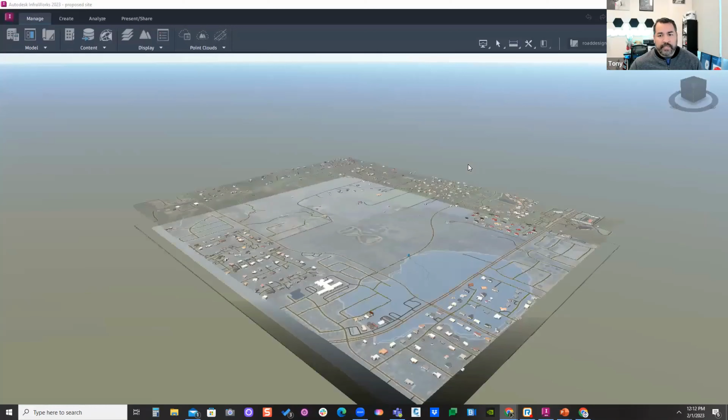Okay, it's still building the model. This really typically also depends on how large your model is, how long it takes to open, how big the file is here. All right, so when I first started, it's under the master view. This is what I have here. This was actually another proposal.

Let's switch over. It's running a little slow today. All right, here we go.

Now I'm in conceptual view. So I've actually lowered the resolution and added transparency for better performance. And then when I'm done, I go back and change this to engineering view so it looks more vivid, as you can see here. So I'm basically just working in my conceptual view.

Now I want to build something. I want to build a road here and analyze a culvert. So I'm going to go into Create, then into Transportation, and I'm going to do a planning road first. I'm just going to design something simple in here, go into, let's say, a 2-lane road.

Let's see, this sidewalk, green space street. I'm going to select this one, move this over and connect to this area intersection right here. And I'm going to connect to the road that's over here, this intersection point over here. So I'm going to draw a straight line and come in at an angle, draw 2 radiuses, and then connect to this point here.

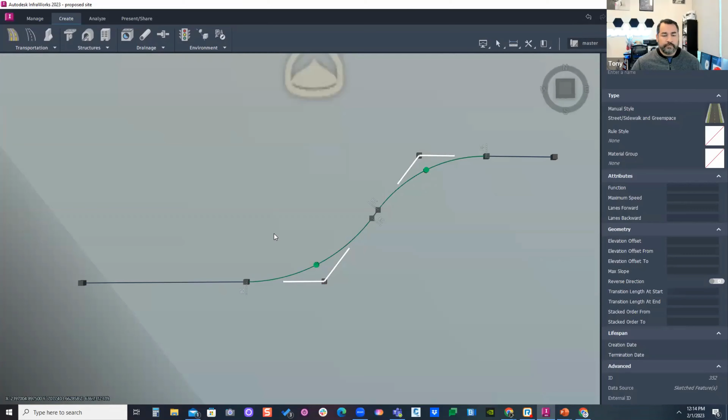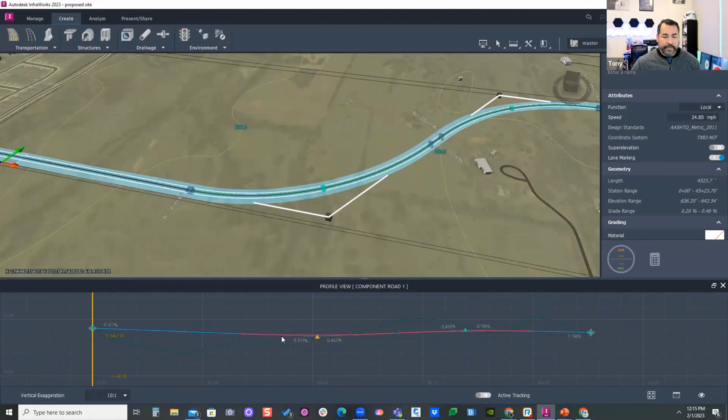Okay, and then I can look at the profile of this road. I zoom in and look at the profile and see it's actually identified. I actually have some low and high points here, but I'm going to go in here, move these high points and low points. I'm going to add a curve in here.

I'm going to move this over, I'm going to slide this over. Now, I'm not following transportation design parameters right now, I'm just creating some low and high points just for this webinar. And here, if I zoom in, I'll be able to see the curve. I can make it larger.

And of course, I'm exaggerating a lot right now. I would probably have another curve right here. Let me just keep zooming out here. And I could actually have another high point here, but just to save time, I'm just showing you some lows and high points in here. Let me lower this a little bit more to get closer to existing conditions.

And yes, I could create just a rolling hill of high and low points through here on this profile of this road, but we'll hold what we have right now. Let me make this curve a little bit bigger.

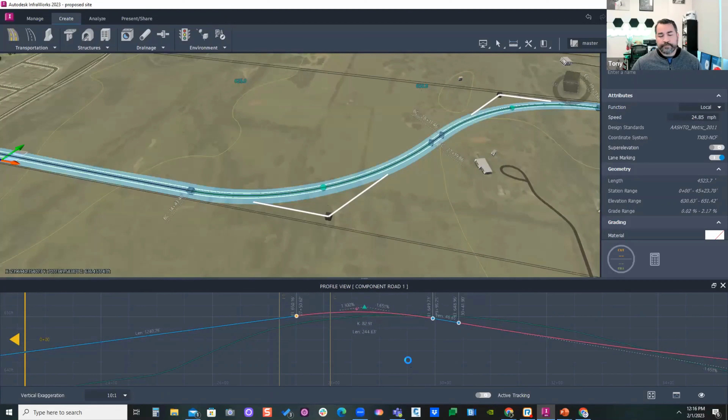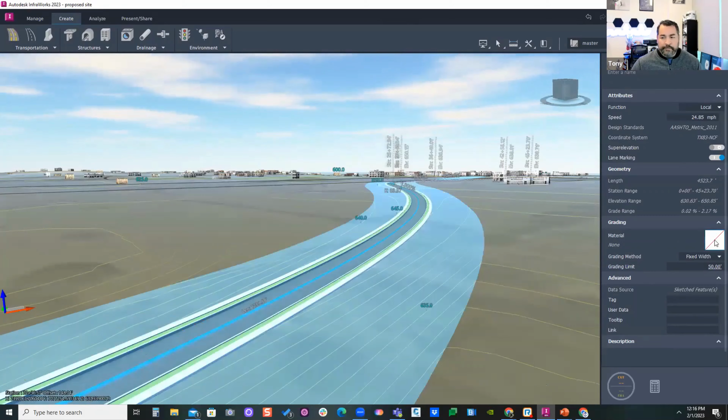And as you can see, we have some roadside grading happening here, and you can control that. Right now it has a fixed width on the roadside grading, but I can change that fixed width to, let's just say, I'm going to put 50 here to give it plenty of room to grade out to natural ground for my road here.

So now that I have this model, I want to know where is water draining? I can't tell visually by the aerial, so I'm going to use my terrain tool.

So if I go to manage and display and go to terrain themes, let me just go ahead and delete this here and create a new one. I'll hit the plus symbol. And I'm going to use at the bottom here, the palette types. I'm going to use the USGS DEM palette type.

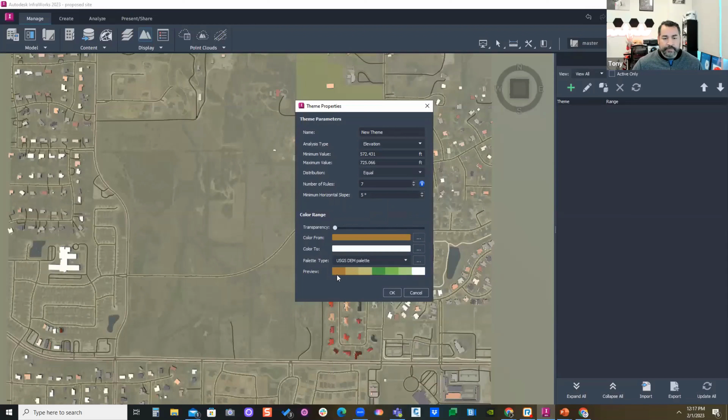You can see here, this is kind of what you see on the USGS maps. And I can add a transparency also on here. I'll hit OK.

Now I'm going to change my, because of the style I have here, but you can kind of see it, I can edit that transparency. As you can see, it's changing here. But now I can identify, okay, green, white is the very top, green is a higher elevation, and brown, the dark brown, you start seeing valley gutters and stuff.

So in here, I can see that there's actually a natural stream, kind of a low-lying area through here, a riverbank or creek bank through here. So I know there's going to be a low point somewhere in this area here. So I'm going to turn this back off. I do have the contours turned on, so when I zoom in, you'll start seeing more and more contours being displayed. And that's through your visual style in here, so you can turn on the contours.

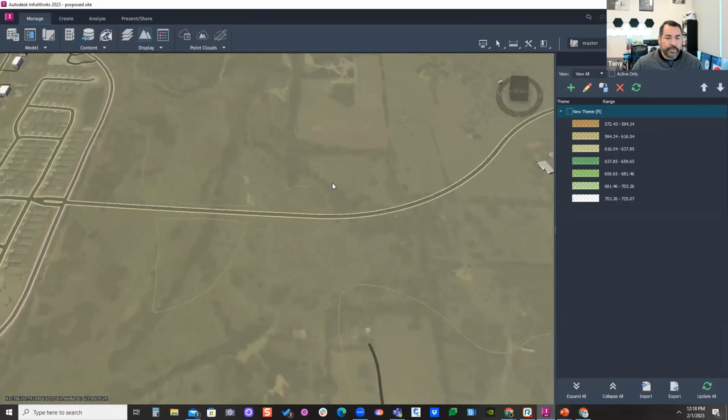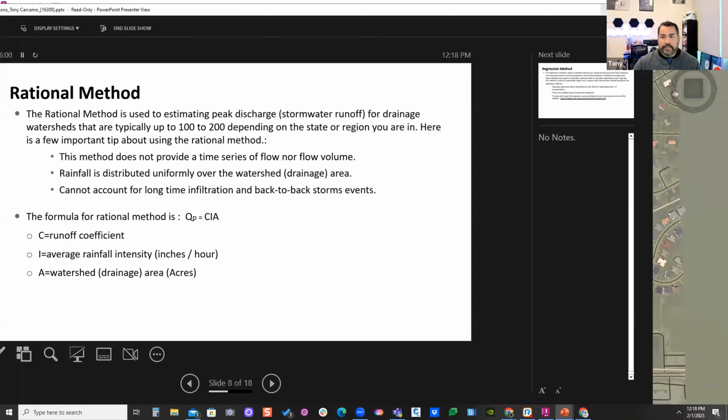Okay, so I do have a component road. Let's go ahead and build a watershed. Now, the watershed, I want to slide this over real quick, this PowerPoint slide. See if I can minimize this in here. Oop, not this screen. Let me talk about the actual methods in here real quick. So I'm going to stop sharing this and share my other screen.

There's three types that InfraWorks is using. So the first type, let me go back to the first one, is the rational method. Typically that's being used for up to 100, 200 acres, depending on your state or region. Every state and region has some kind of stormwater design manual or regional stormwater manual that tells you what that maximum limit is when you're using rational method.

And what is that formula? Really it is the peak flow, so basically your coefficient times your intensity times your area. That's the rational method formula. Some of the important things to think about is this method does not provide a time series of flow nor flow volume. Rainfall is distributed uniformly over a watershed or a drainage area. It cannot account for long-time infiltration or back-to-back storm events. Just things to think about when you're doing rational methods.

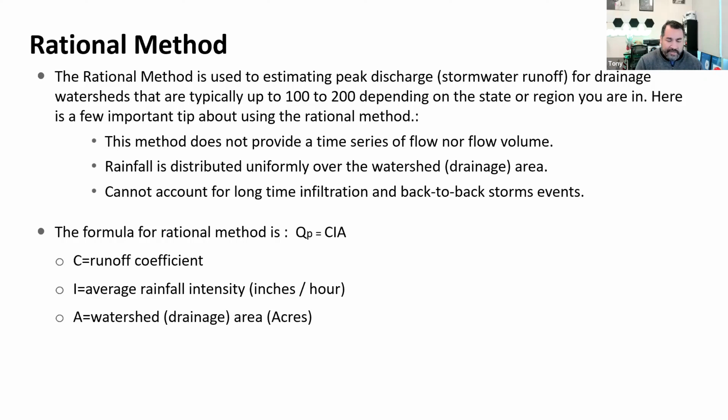The other method that InfraWorks also provides is the regression method. It's used to estimate statistics for seasonal or annual low flow frequency and seasonal period of record and period of record flow durations. So InfraWorks in here provides, like each state, the data that's been collected by USGS. Typically, this is created for those state departments, transportation departments, and you'll have those peak regions for each state that you can select from a pull down in here.

So there's the website where it's actually pulling this data from. If you want to, if you need to know which website it's coming from, it's from that USGS maps. That's the link right there for the data.

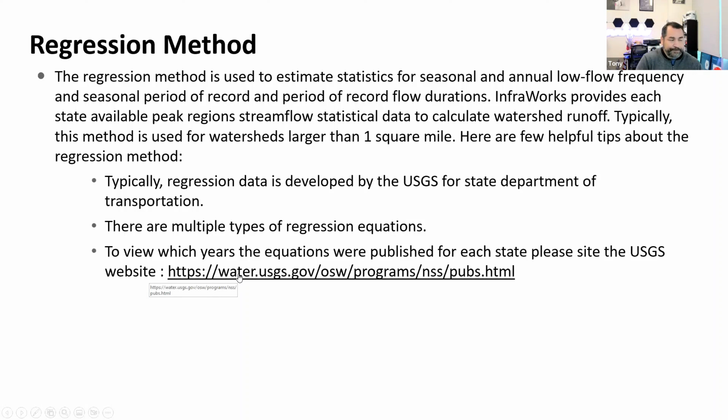And then the third option is a user defined, which you are selecting the coefficient and you're manually typing in the actual rainfall. And you can get that straight from, typically when I'm doing design, I'm getting that straight from the local or the county or the state regional design manual, city drainage manual, or even stormwater manuals and stuff like that. So even transportation actually have that coefficient or that rainfall data for you already provided for you.

Okay, so let me stop sharing and go back to my other screen, to my InfraWorks. I'm going to create a watershed to see what it can find crossing this road I just designed.

Let's go into my analysis, I'm going to say watershed. It says it's going to use credits, I'm going to click OK. I think the credit's been removed, if I remember right. It recognizes this component road, so I'm just going to click inside the component road.

But here on the watershed, we have these analysis settings. These tell you, when it's calculating based on the terrain, the grid spacing. So do you want it every 20 meters? And how many actual grid points do you want within that area? Typically I lower this down, it becomes more accurate when you lower it.

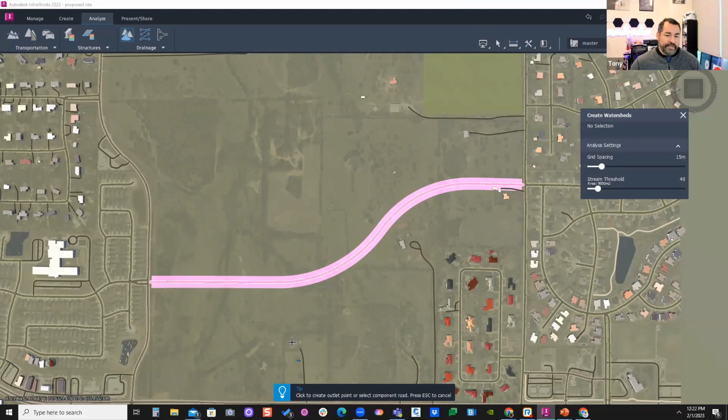So I'm going to lower this down. It's all about the grid points when it's doing its analysis for the watershed. For bigger areas, I wouldn't have it like this, I'd have it more towards the middle for larger areas. But I'm going to come in here knowing the water's traveling north, and point just inside the road and hit enter to select the whole road, so it can identify what's actually crossing that component road I just designed.

Now, typically I would have just created a new proposal. I wouldn't have done this in the master proposal. So it's actually looking at what I have in the model based on the terrain.

All right, and this is what it came up with. It identified 2 locations where this drainage - let me turn on back to engineering view. As you can see right here, it actually has 2 small streams that cross this component road, identifying 2 drainage patterns. Now some people call it watersheds, some call it drainage patterns, in some regions they call it drainage areas. I like to call them drainage areas, but it just depends on what region of the United States you're in.

Okay, so I can actually color code this. If you don't want to identify this by colors in different regions, you can click on here and change it in my little asset card. I can change that color to something different for each pattern, as you can see there. Now it's telling me I don't have anything because I haven't assigned the actual hydrology method.

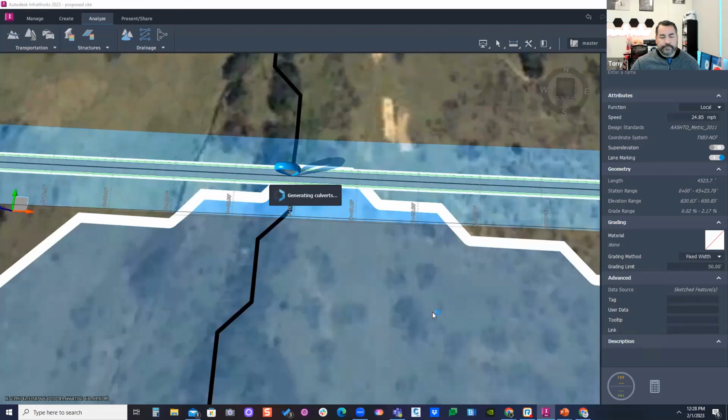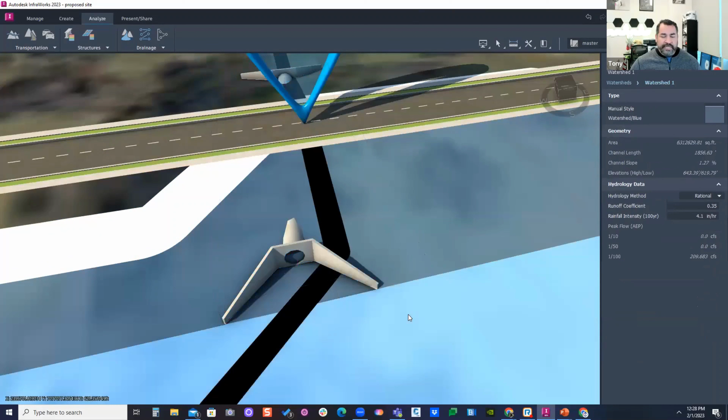It's going to place a generic culvert in there for me, and it should be placing two. Okay, there it is, there's one culvert already. I'll click on it. Notice here, because I already assigned a watershed, it already sized the culvert for me. Notice it jumped to 66 inches in my dialog box.

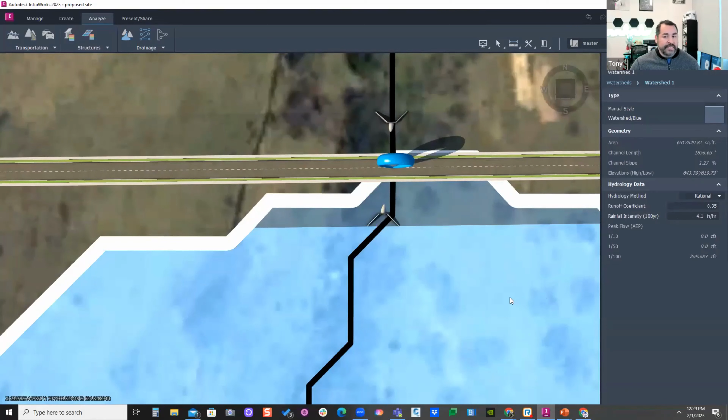If I didn't assign a hydrology method for this watershed and left it as default, which said zero, and placed the culvert, then came back and assigned the hydrology method, it would size the pipe. As soon as I clicked on the pipe, it would upsize it and do the analysis for me. So this software actually does a preliminary culvert sizing for you automatically.

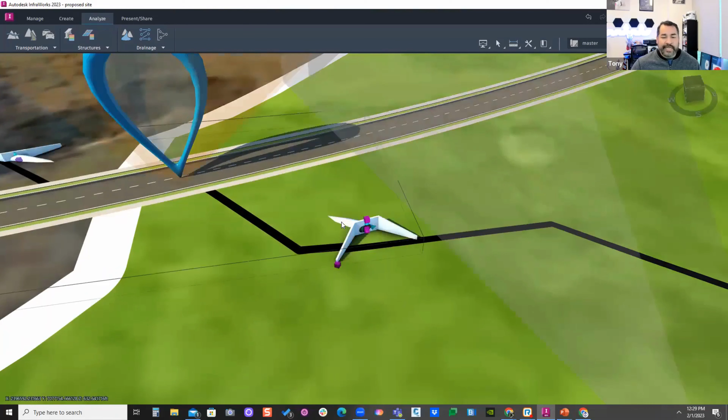Let's go look at the other one real quick. Here's the other one, it's coming at an angle. There's the stream. Now, you don't have to use these parts, you can use a box and stuff. So if I click on the pipe, I can change the actual piping. I can go to a box.

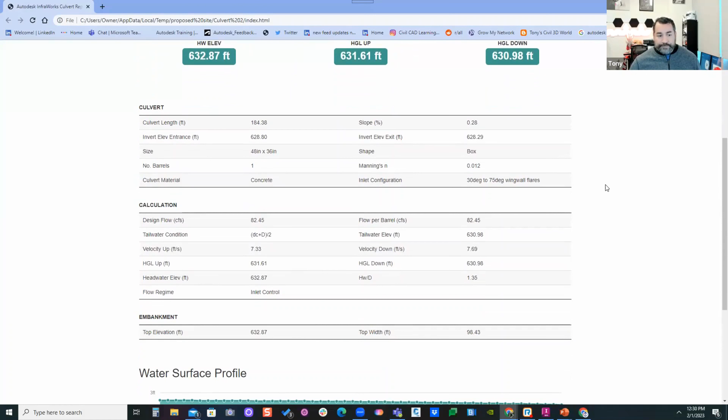There we go, and then I can run a report, run that analysis. I'll click on the pipe here and say analyze culvert, then go look at our calculations. You'll get something like this, which is really nice. You can look at your inlet and outlet, your hydraulic grade line, your hydraulic information, your tailwater conditions. It's a nice little analysis tool you can print out for your culvert, and you can see if it's working or not.

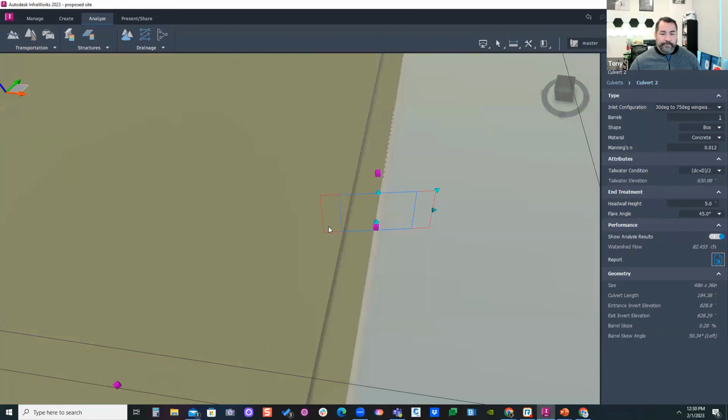You can also change the head walls and stuff like that, raise the head wall heights, manipulate the size. Here you've got grips, I can make this wider, I can make it taller. You have total control in this structure. Now these are using the infrastructure parts built into InfraWorks. If you have those parts and are using them in Civil 3D, you'll be able to export these head walls straight into Civil 3D.

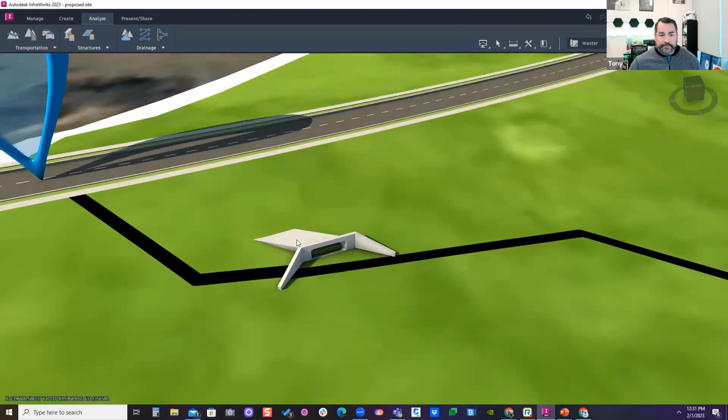When I hover over the head wall on the pipe, there you go, inlet control or outlet control conditions, you get that little preview. You can go back and click on the report, and you can turn off that analysis too. On here it says 'show analysis result,' you can turn that off. The flare angle, you can change that angle on the head wall here, maybe you want to do like 30 degrees.

And it's switching that now. Inlet configuration, you can also change that inlet configuration in there automatically.

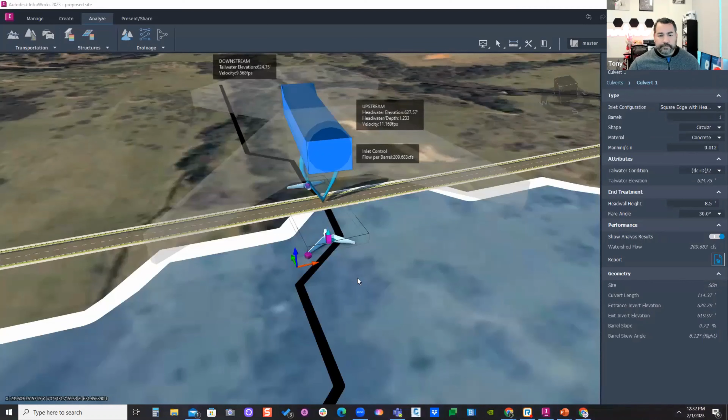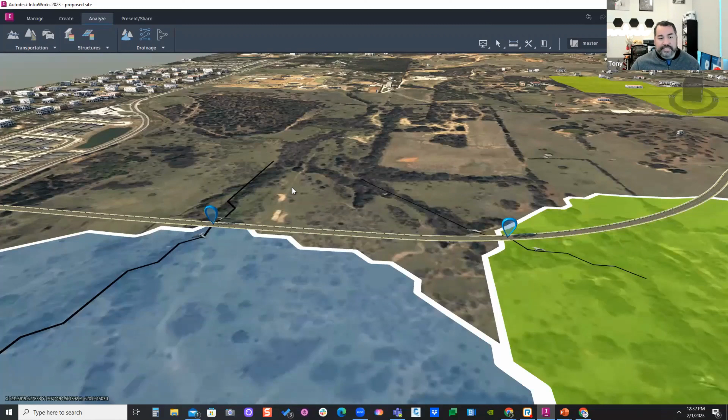Pretty cool, I guess. Now, when I'm doing preliminary concept plans and I need to build some culverts, I'll do it in InfraWorks really quick. I'll build a road, figure out what my road elevation needs to be, then come in here, sketch one in, and say analyze culvert. Now I know what that culvert needs to be, what the coverage needs to be, what that drainage pattern is for that area.

Now, on a couple of my projects, I actually did a comparison. I took an as-built set of plans and compared what InfraWorks came up with versus what I had on my as-built plans. On some projects it was like 95% accurate, dead on. In some places it was like 70% accurate. I think the surface I had was more accurate than what InfraWorks was providing.

So just always verify the drainage patterns in here. Now you can't manipulate this. Notice there's no grips, I can't modify this. This is strictly based on the terrain model that's been brought in.

If you are curious where that model is coming from, that model comes from the National Elevation Data Set. So if you type it into Google and go to the National Elevation Data Set, that is basically the USGS maps, and that's how it's building that watershed, from that terrain model from the USGS maps.

So yes, you could potentially use yours. I think if you brought your own in and turned off the model that you got from Model Builder, it would build a watershed from that. So, it is pretty cool, I do like it.

So if you are taking advantage of those infrastructure parts that are in InfraWorks and Civil 3D, you can easily bring that into Civil 3D now and then modify it for final engineering design. So remember, this is strictly preliminary analysis. This is not final, you always want to go check it, do your final analysis through whatever software you're using.

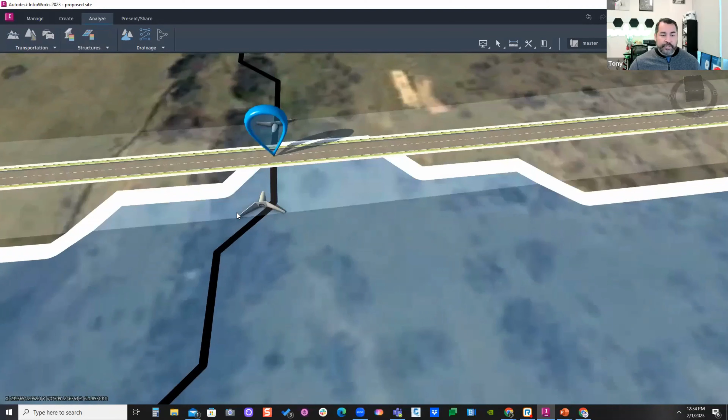So, okay, let's talk about the rainfall real quick. And yes, you could move these around. You have the gizmos, you can shift it around, you can shift the angle of the pipe and stuff like that. You can make modifications to this, you just can't modify the watersheds and stuff.

So yeah, okay, now somebody says, well, I want to change that rainfall intensity, I don't like what it's using, I want to use what I have. You may have more accurate data. So if I go to my rainfall, right here underneath the analyze rainfall content, this is the three rainfall content it provides when you're doing culvert analysis or even storm systems in here.

Typically, to save time, I would just make a copy. You can come here and say create a copy of this. Or if you really want to manipulate it, I can click on the edit button and then type in your rainfall intensity data from whatever manual you're using. I can just double click and change that value in here if you want to.

I typically want to save what InfraWorks provides and make my own copy. And maybe you save it per city or per county or per region. So in here, I would probably have one for every city, if I'm in the DFW area, because the rainfall does vary.

You can also import rainfall data. Now that rainfall data can be in three or four formats. You've got the CSV format, which is from the NOAA, you also have an IDF file format and .stm file format. So you have these three, actually four different file formats that you can bring in your own rainfall data with. You also have an option to export this out in case you want to use it in other products.

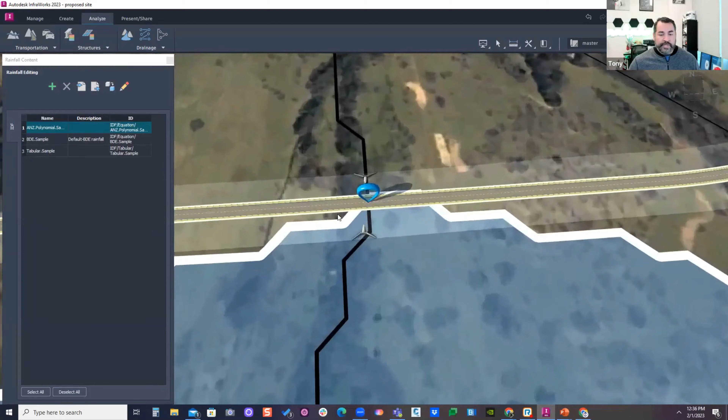So I typically come in here and modify, I'll create my own and modify it, especially when I'm designing a storm system for the road in here. So if I was sketching something out in the road, let's see here.

Now, real quick, on the culvert, you can change the tailwater conditions. Notice here there's a pull-down, so if you want crown or critical flow, normal, or user-defined, you have that option to change that value in here.

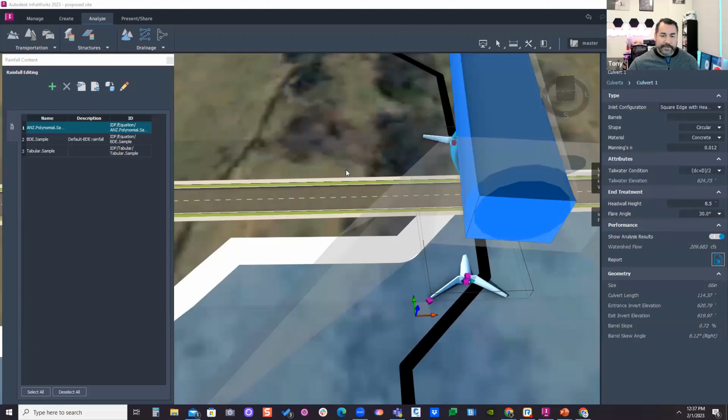Oh, that's what I meant. Yeah, NOAA, I'm sorry if I said OSHA. Yes, NOAA, good catch. Yes, definitely the NOAA Atlas 14, that's what I'm using for all my analysis when I'm doing hydrology and hydraulics. So I use the Atlas 14. I think it's accepted across Texas now. I can't speak for other states, but yeah, the Atlas 14. Well Tony, if the water gets too high, it is an OSHA issue. Yeah, exactly, exactly.

So somebody asked me, hey, could I take this watershed and bring it into Civil 3D? Yes, I can. So if I close this out, let me just go back to the home, and then there's that model we just downloaded earlier. I'm going to close this out.

I think I may have done it already. I closed Civil 3D, but I'm going to let Civil 3D open while I have it. But yes, you can bring it in, but it brings it in as like a 3D polyline, and then you can convert it into a catchment area, or you can convert that into a parcel that can represent a watershed or drainage. So sometimes I'll do that, I'll just bring that in right into Civil 3D and then convert that into a parcel. I use parcels for my watersheds, so it saves me time, I don't have to go and sketch that out. Then I can actually change the watershed pattern boundaries with my parcels and stuff like that.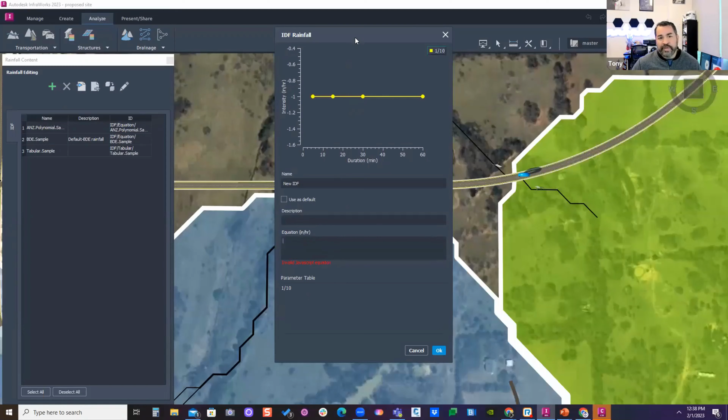Let's go back to the rainfall content. Let's see, copy it. If you are going to create a new one, you can create one from scratch. I've never really done it, you just need to type in that equation you're using for that rainfall, but you can create one from scratch in here. I've never really attempted to do one, but you do have that flexibility to create your very own from scratch. So if somebody's asking, can we build one from scratch? Let's see here.

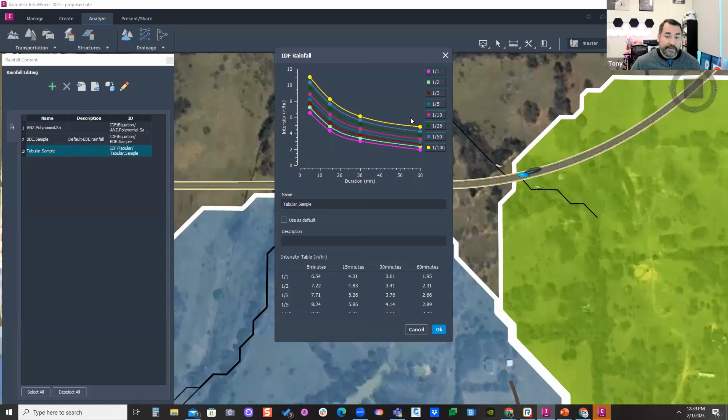I think that's it. And then here, you can click on these to show all of them. I'm just clicking once to see what that rainfall intensity is per your yearly rain event, so a 5-year event, 10-year event, 25-year event. You're just clicking once to turn it off and on. So typically your manual will tell you, hey, for storm pipes, you're using a 10 or 25-year event, detention pond, 100-year event. I'm ultra-conservative, so I'm designing my whole storm system at a 100-year event. But you just click here to turn those event diagrams off and on.

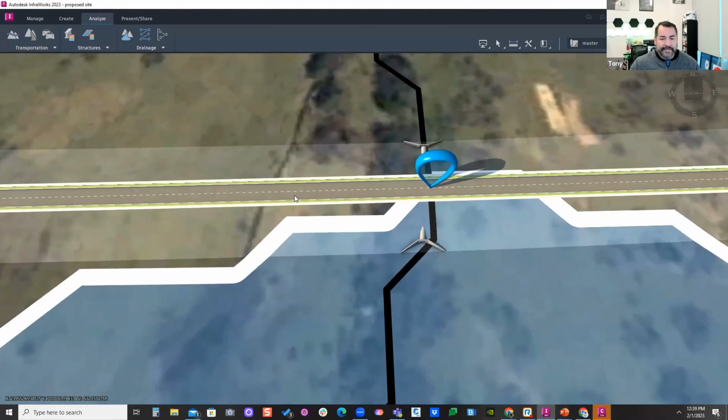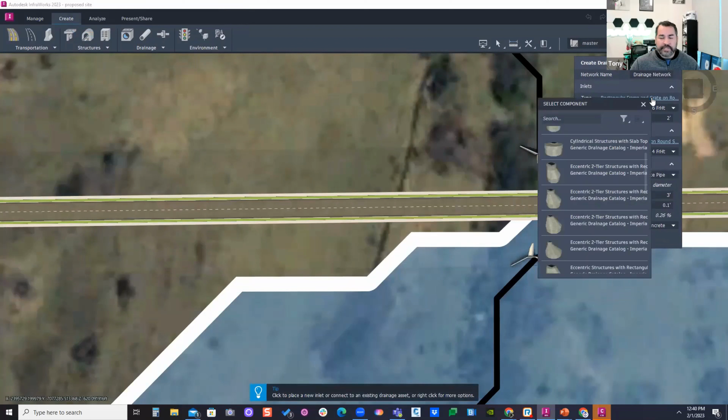Okay, now let's talk about the storm pipes in the road. Now I can manually create a storm system in here, or I can have InfraWorks do it. Sometimes it doesn't do it, sometimes it does, and it takes a couple practice runs to do it. I'm going to sketch one out. You can actually sketch one out by going into create drainage network. You get this dialog box, and here you get those infrastructure parts. There's a huge list of different types of inlets and manholes, what your sump depth needs to be, there's your sizes, your manholes if you're using manholes, and then also for pipes, if you want to color code these, I'm using concrete pipe, and I can sketch this out.

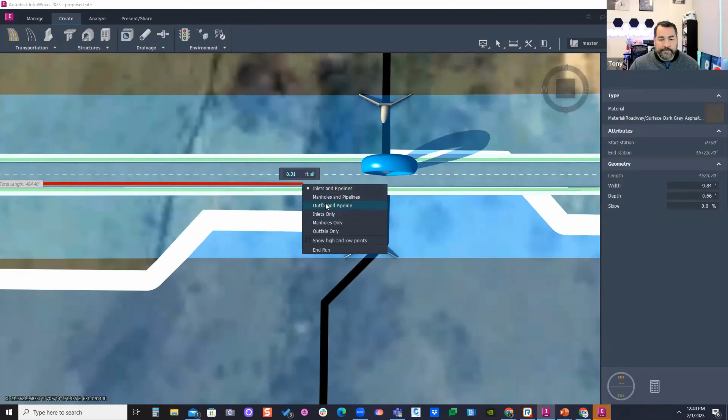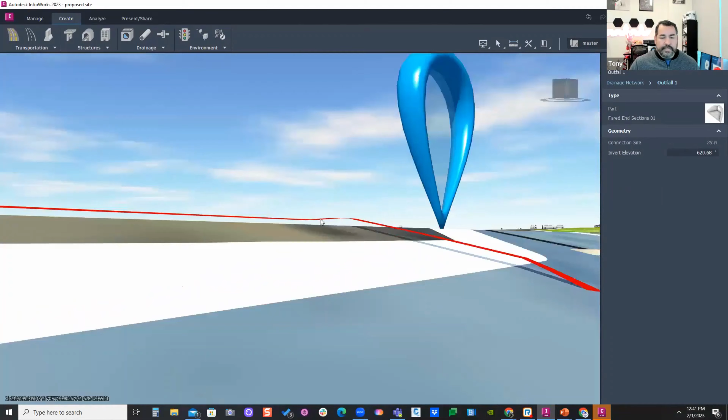I can come in here, zoom in, and sketch some inlets, come over here, and then output a pipe. Let's see if I can connect to it. And go over here. And run. So as you can see, there's actually a pipe system underneath here, there's the manholes, and I can slide these around. So there's that manhole there, and you can make adjustments.

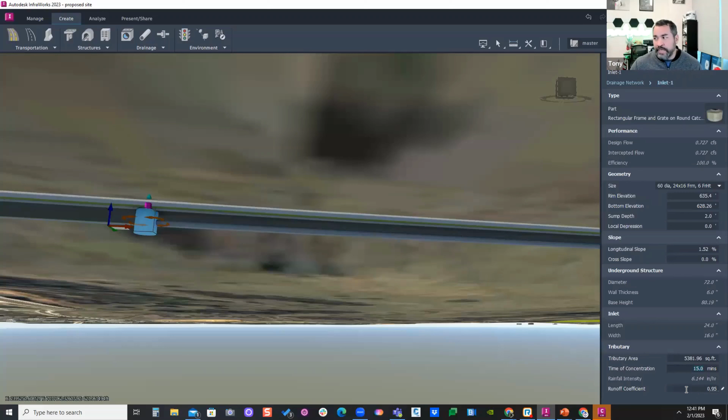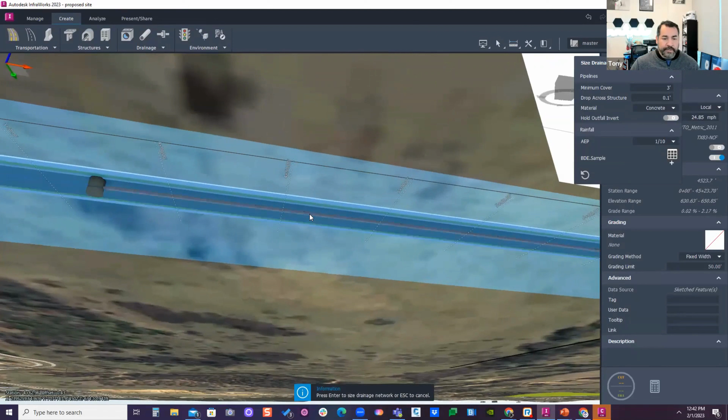When I click on the inlet, I can come into my asset card here and change these values. So this is the actual tributary area for that road. You can change your time of concentration, unless you're calculating time of concentration within your storm system. You can change that runoff coefficient, maybe 0.9 or 1 depending on what region or state you're in. Let's see if I can get it to work, sometimes I can, sometimes I can't. I can click on the component road, right-click and say drainage, size drainage network, and it should size the culverts and my pipe system in here. I have to go underneath here.

Let me run an analysis real quick. Let's go look at it and see if it did anything.

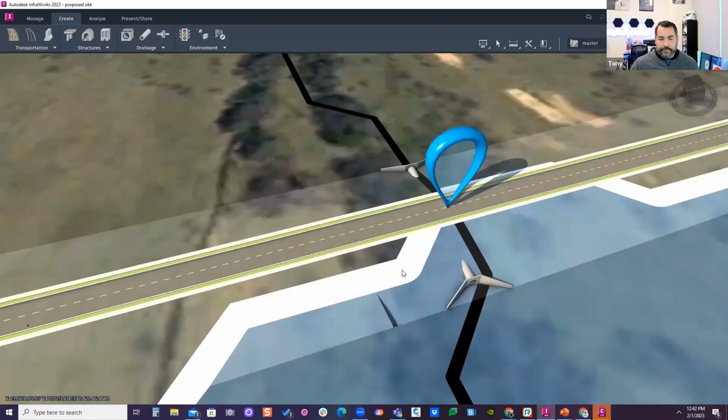It looked like it took my head wall way down. It wasn't that far down, but it took my head wall all the way down to the bottom.

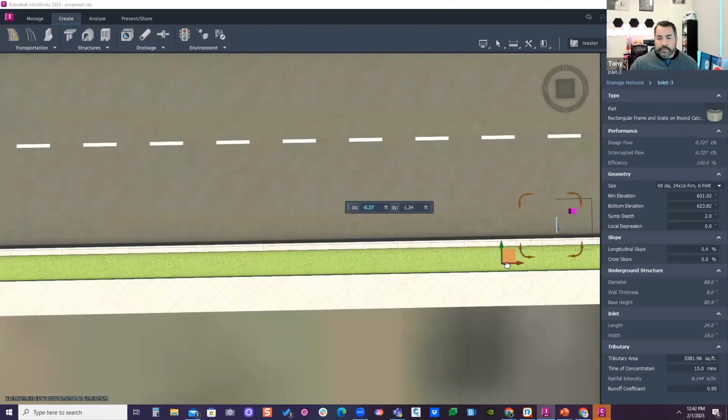You can continue adding this manually and slide these around. Like this inlet's not going to be really there, so I'm going to slide this over to being right there.

Uh-oh, did it? What happened there? Let's try this again, see if I can move it. There we go, so you can move this around.

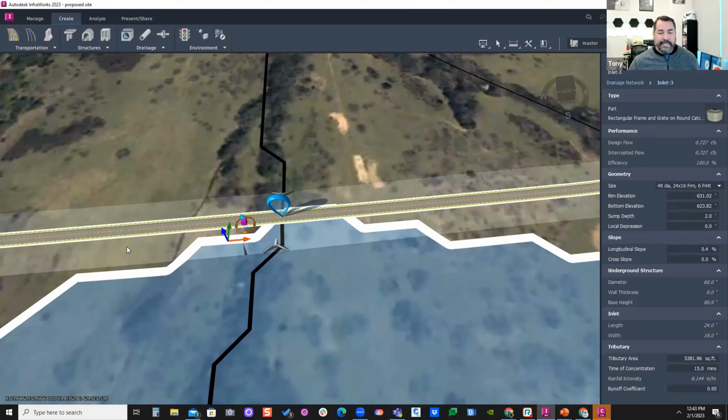To whatever location you want. Typically, I'm not designing my storm system in InfraWorks. I usually design it in Civil 3D because I'll be making constant modifications to those locations when I'm designing this.

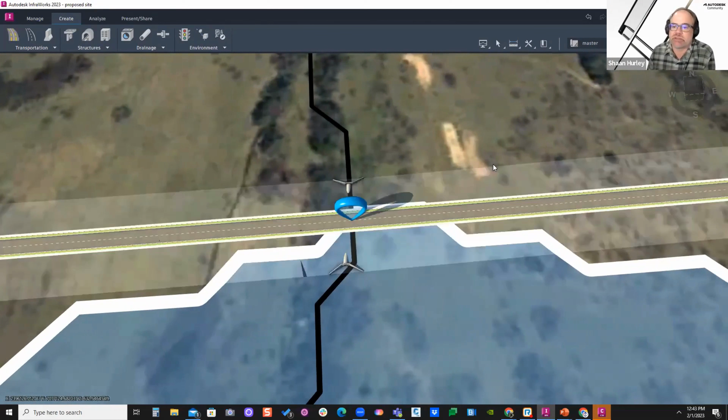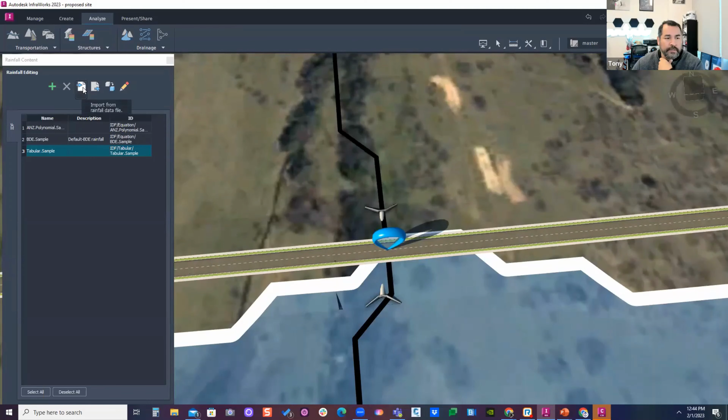Yep, so okay, I see there - InfraWorks .csv. So yes, as long as you have one of these file formats, you can bring it in.

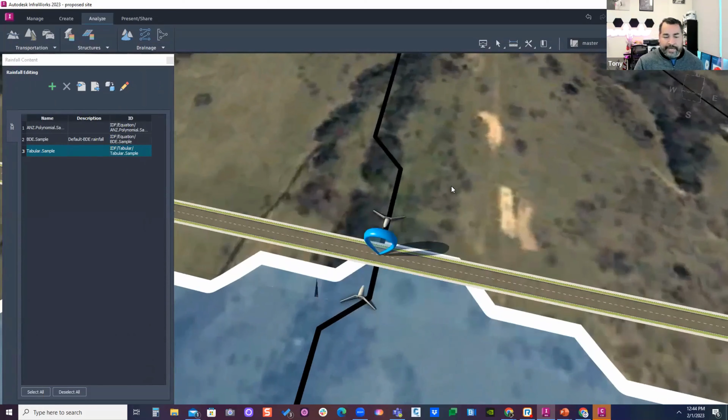And then you can export. Now the only thing I haven't tested is whether there's a workflow where I can take a storm system created here and export it to Innovyze, their system. I haven't had a chance to play with their hydraulic tools, the new Autodesk stuff, to see if I can easily take something here, like this culvert, right into Innovyze. I haven't really checked if you can do that, but it would be really nice - build a culvert here and then do the final analysis within Innovyze.

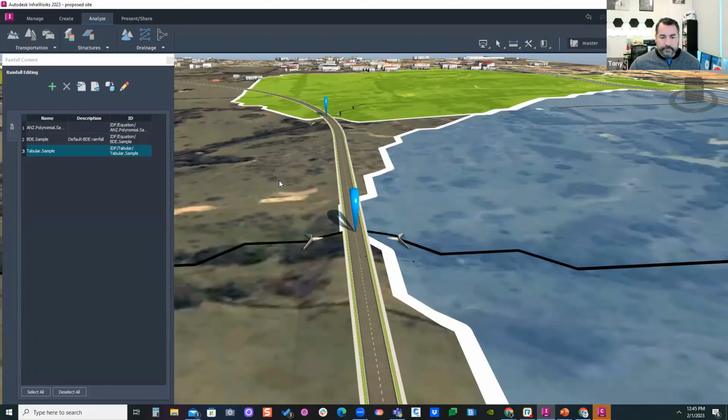Typically when I'm doing a lot of concept plans for developers, I'll download and create a model for the site because I want those USGS maps. I could be waiting for the survey data, but I want to start designing, doing preliminary analysis of the roads, the drainage, the culverts, and then I'll take it right into Civil 3D. Once I create the watersheds, I'll take it into Civil 3D and start designing while I'm waiting for the survey and stuff like that.

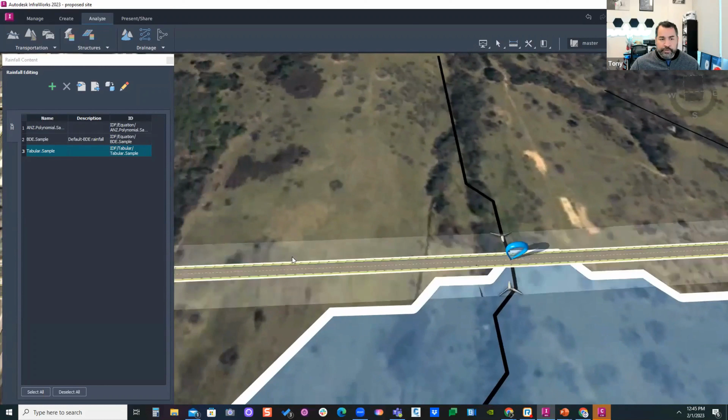Now there is a tool in here - once you build your roads, got just 15 minutes left, but if I build a complete storm system on this road, there's a tool called Inspect Performance. I don't think it'll work here since I don't have an outfall pipe, but let's try.

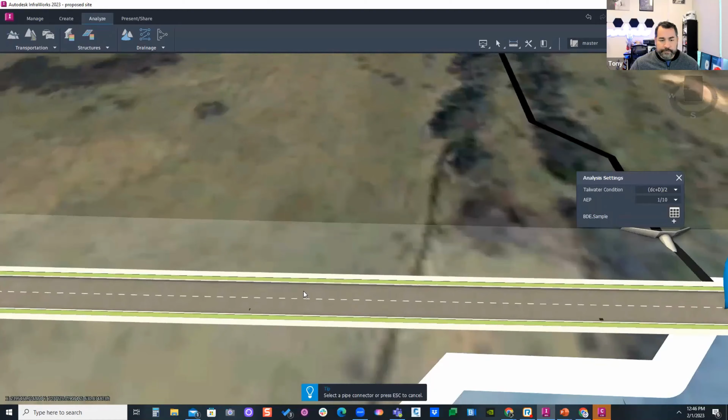I'm going to click connector. It's not letting me select it. Let me try the other one. Okay, try these two.

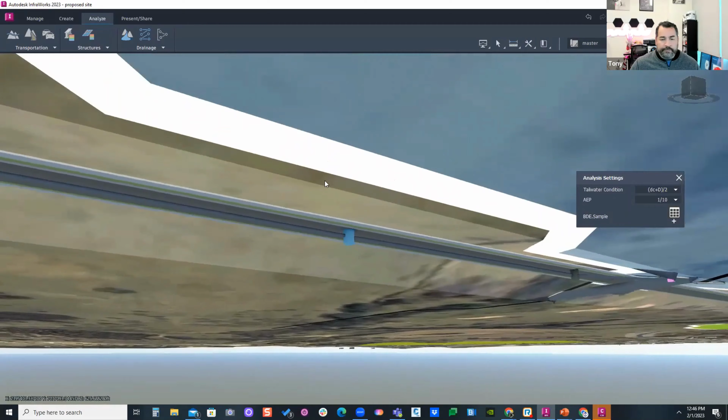Notice here it changed colors - you got one that's actually pink and one is blue. I don't have a complete system in here, but this tool, Inspect Performance, will show you and light up if the pipe is surcharging through your system. It's color coding those items through your pipe. It'll show you the energy grade line, and I think it even gives you the hydraulic grade line data too, at this point and this point.

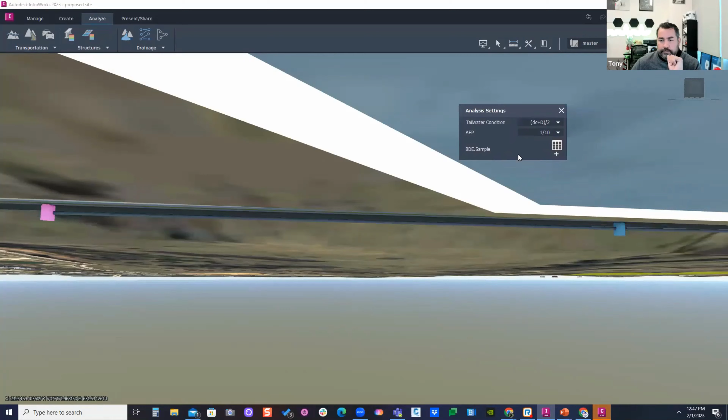If I change the road parameter - that's a good question. So if I change the low and high points on this road, now the watershed is changing. I just need to click on the road. That's a good question, just click on my road here.

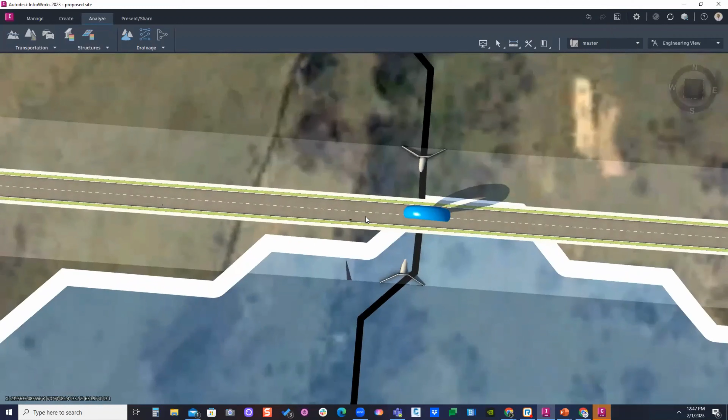Is that Victor's question? Did the culvert auto-upsize for the new flow? Yeah, if the watershed changes or the road low and high points with the culverts, you can actually click on the road and say drainage, size drainage network. You can also just click on the pipe.

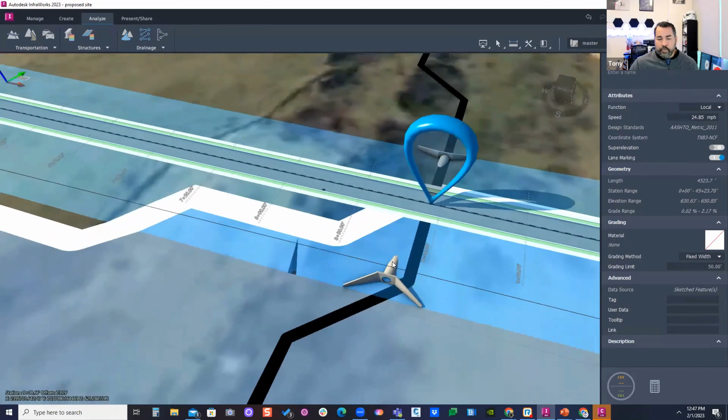If the watershed changes, I can actually click on the pipe and right click and say analyze culvert, if any of that data changes.

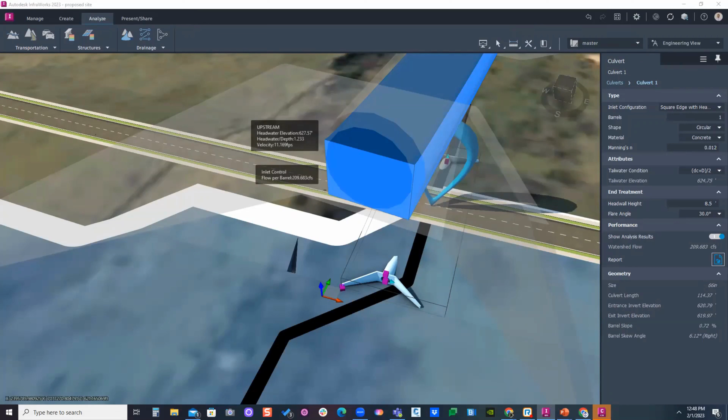I see Bob's comment—yeah, I was seeing Robert's. Yeah, save your culverts to shape files from InfraWorks. Oh yeah, good, that'd be really nice.

So how many of y'all have actually played with the culverts, storm systems, and watershed tools in InfraWorks? I don't know if anybody's had an opportunity to play with it.

When I'm doing really big models, like this good size one here, and there's even bigger ones, I'll usually use InfraWorks for a quick and dirty analysis. When I have the pre-development and I'm getting with the developer about what we've got going on the road and the culverts, I'll use InfraWorks for a real quick check. And if I have any updated LiDAR data, I'll import it in here and use that surface to create my watershed.

There used to be a simulator in here to do stormwater water surface simulation stuff—I'm not sure if it's still in this version, but every update they add things and remove things while they're tweaking InfraWorks. Definitely play with it.

I like the culvert tool in here all the time—I'm always playing with it. Then I'll finalize it, typically within Hydraflow Express when I bring it into Civil 3D, like okay, this is what it's going to be, let me just finalize and double check in Civil 3D. So what is this going to look like?

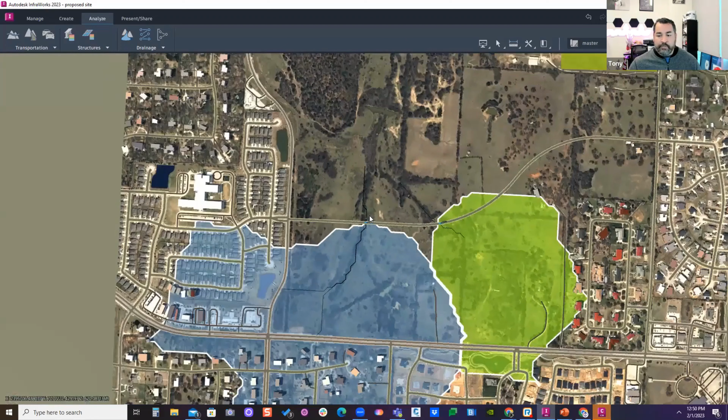I'm going to close this drawing and see what it looked like in Civil 3D. So I'm going to come in here, go to my home—this is master view. Okay, go home, close it, open Civil 3D, go to a blank drawing.

Like I said, if I was using the infrastructure parts editor and had a template set up, those parts will come in—that culvert will come in correctly with the right parts. I'm going to go into my insert tab and open InfraWorks model, find the folder—I think I had a second site. Yeah, it's this one here.

Now, I haven't assigned a coordinate system. I'm going to use the coordinate system that was in that model, which was TX83-NCF for Texas. This process really depends on the size of your model—this is a fairly good size, that's why it's taking a little bit longer.

I'm going to click here and say use InfraWorks model coordinate system, then check everything under refine selection set. When I click on this, because the model is pretty large, it does take a while—it'll actually hang because it's looking at every road, since you're about to bring in the center line of every road in the whole model, and that was a lot of roads. It's also looking for any pipe networks, watersheds, coverage areas, and surfaces, so it's processing all that in the background before it displays.

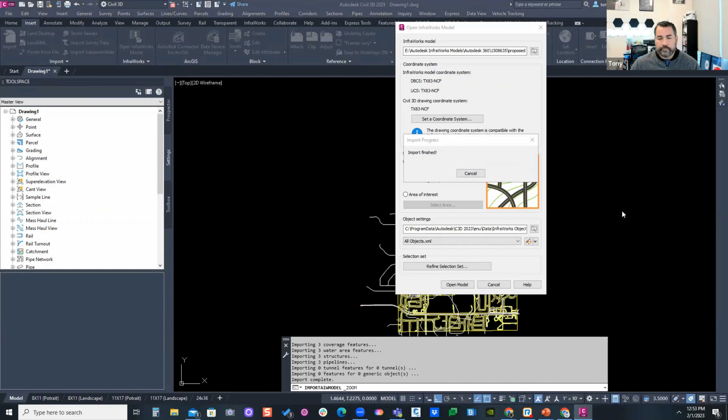There we go. And then there's those two watersheds. You can see they're just polylines. Let me zoom in here. There, it's a 3D polyline. You can now turn that into maybe a parcel or catchment area.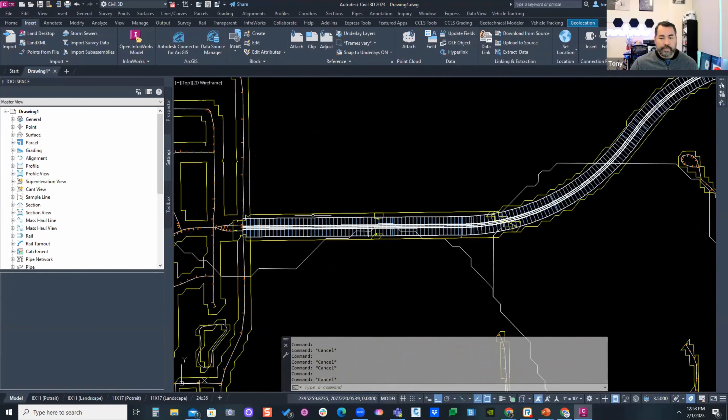But you also have your corridor here of that road I built. I've got a corridor already built in here. Now, if I was using those infrastructure parts, they would show up right here. Also, there's my alignments of all the center lines and roads. Also my surfaces, those are my two surfaces in here.

You got proposed because that's for the corridor. So as you can see here, I just brought everything in.

One quick note on InfraWorks, creating the watersheds - it's helpful to create a terrain theme because that will help you identify low points in the model. If you don't have that, then you're just kind of guessing. And when you create it, you really got to pin down where exactly that low point is, because sometimes you'll get an error message saying it couldn't identify the watershed in your model.

And so you'll have to move the slider down for that grid. Sometimes it may take 4 attempts, and then InfraWorks will do it. It's that accurate - you got to be somewhere close to that low point within your model.

Let's go back to the model real quick. We're down to our last 5 minutes here. I just need like 3 minutes to close.

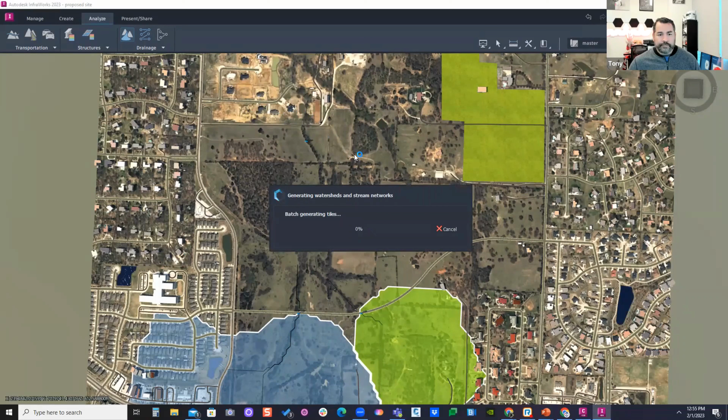And you see when I clicked on it, it actually encompassed all the other two. You can see how big it is. So, and then it creates this little streamline showing where that natural stream is in this model.

All right, I'll pause here, see if there's any final questions. I know this is kind of a quick crash course of what's in InfraWorks - it wasn't a step-by-step direction. I'm just showing key points of what you can do in InfraWorks with some of those hydraulic tools.

So in here, you've got selecting and sizing your network, highlighting your drainage patterns, creating watersheds, your rainfall intensity. You can create under drainage here, you're going to create your drainage network - that's the tool to create kind of your system within your road.